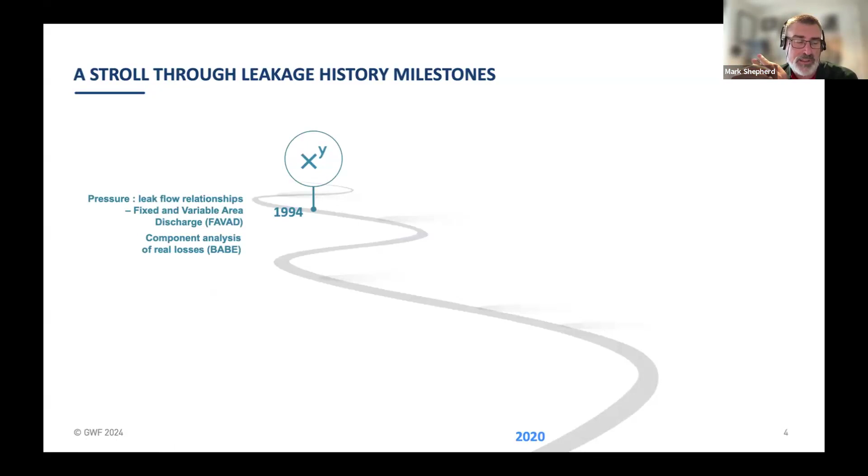Before then, I'm going to take you through a little walk through history. Alan, hopefully you'll enjoy this one. Let's take a walk through where things started. So what I could see, in 1994 we came up with 2 concepts: FAVAD, which is fixed and variable area discharge, and BABE, which came around about the same time. Next development was in 1997, when we started looking at night flow component analysis. Average zone point and night-day factors, or hour-day factors, came around then.

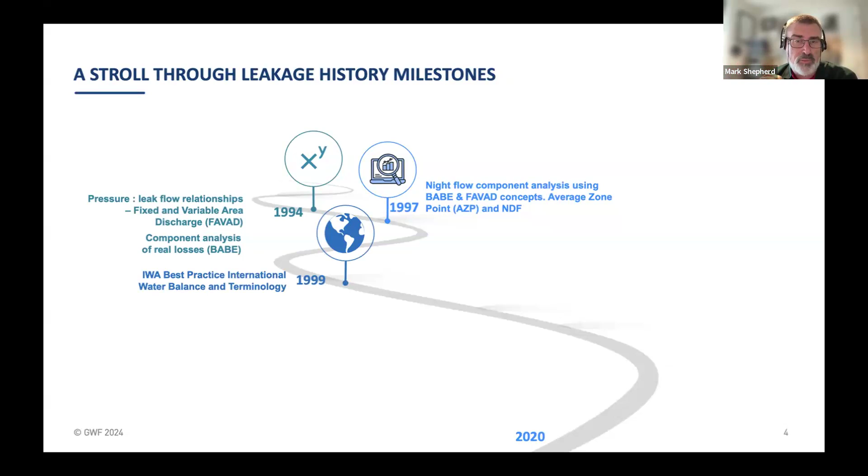In 1999, we came up with the IWA Blue Pages, the document which set out our best practice for water balance and terminology. In 2000, we came up with economic intervention policies and rate of rise of unreported leakage - that's a very complicated icon there, because doing the economic level of leakage was not easy, it was a bit of a donkey. In 2005, we simplified things a little, so we had economic leakage levels with and without pressure management. Then in 2012, the next development, we had pressure-burst frequency relationships.

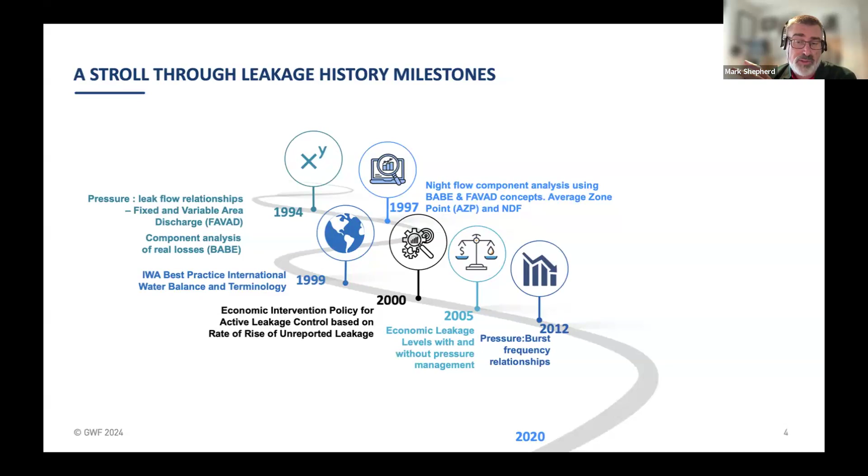2014, a really good document put out by Cor Mercs for the EU - the EU reference document for good practices on leakage management.

In 2017, we came up with N1 varying with pressure, which will be quite a strong point of the webinar today. And in 2020, a couple of people on this call decided to look at this again and see if we could refine it under certain conditions. That took place about three years ago.

Tracing all of those steps back in history, in 1980 was the first mention I could find of a DMA being published - I believe it was UK WAA, report 26, leakage control policy and practice, and that was the first thing I could find about a district metered area. So from 1980 to today, that's 44 years later, and we're still talking about DMAs.

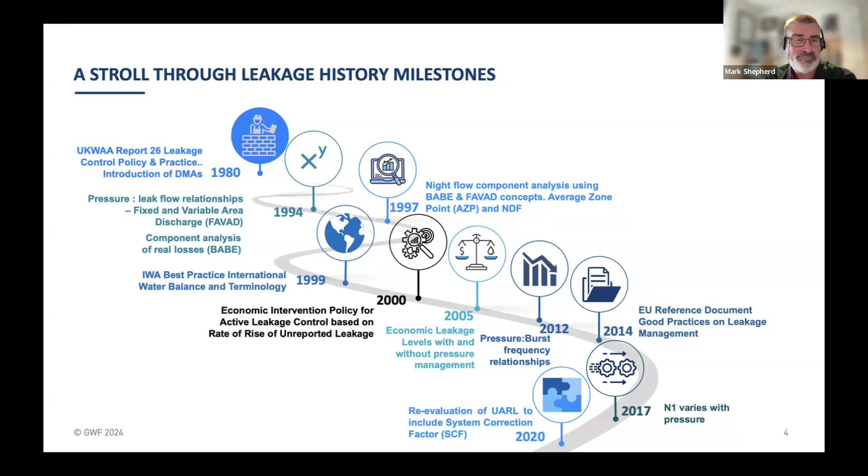So let's start with the building blocks. What are these DMAs? Just a few definitions - I've attributed each definition to its source as we go along.

Here's the first one: small zones between 500 and 3,000 households within a zone. Each DMA is discrete, meaning it's either watertight or monitored, with a defined and permanent boundary, with flows into and out of it monitored by a flow meter.

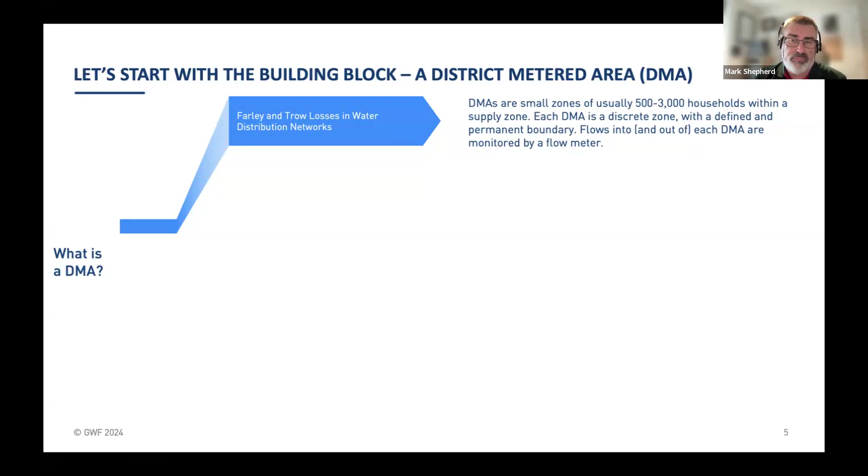Going back to 1980, a DMA is a discrete area of the distribution system created by the closure of valves or complete disconnection of pipework, through which quantities of water entering and leaving are metered. We then analyze those flows to quantify the level of leakage, which helps us as practitioners determine where leakage is and what we can do about it.

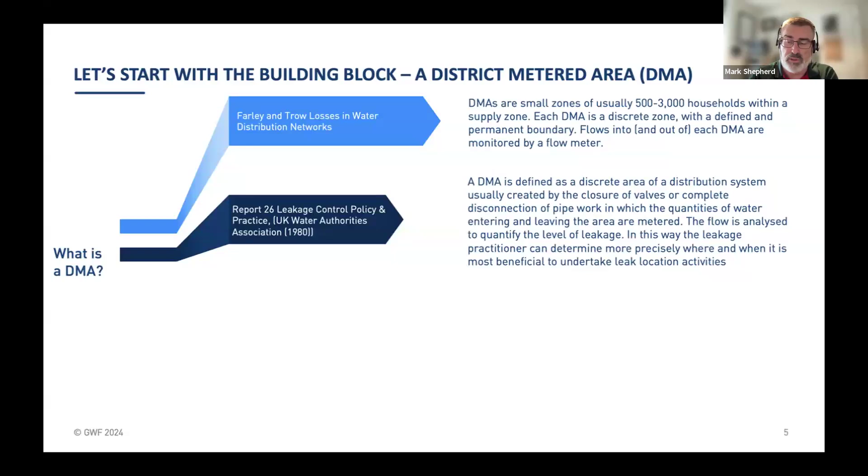Next, let's jump across the pond with the American M36 manual. There, a DMA is described as a small zone, typically between 1,000 and 3,000 connections, with measured supply input flow of sufficiently small volume that individual leakage events can be quantified. That's their definition.

And the last one, back across the pond to the UK, with UKWA's definition of a DMA: it's an area specifically defined by the closure of valves, in which the quantities of water entering and leaving the district are metered. So there are four definitions of a district metered area for you.

In terms of why we have DMAs, I'll go back to, in this case, just three reasons, with references included. AWWA states the purpose of a DMA - the primary concept and advantage - is to isolate and monitor a small area of sufficient scale so that flows can be analyzed to distinguish components of normal consumption from leakage rates.

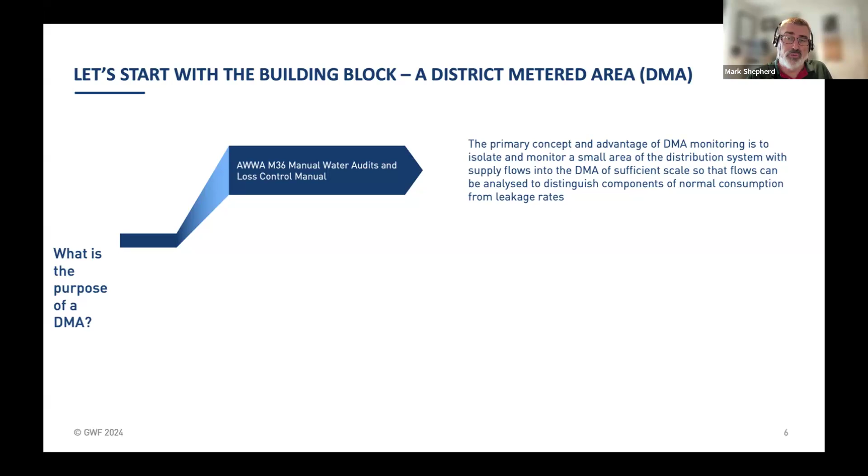Please excuse me if there's a later version - I only had a draft version of the guidance notes from the specialist group. But the purpose of a DMA there is to regularly quantify the leakage level so that leakage location activity is always directed to the worst parts of the network. Division or use of DMAs also facilitates creation of a permanent pressure control system, enabling pressure reduction, reducing the level of background leakage, burst flow rates, and burst frequency.

And the last one, from UKWIR: the purpose of a DMA is a means by which night flows can be regularly monitored, enabling detection of unreported bursts and leakage, and managing the pressure in each district so that the network operates at an optimum level of pressure.

So if you look, there seems to be a common theme internationally in the definition of a DMA and what we use them for - it's pretty much the backbone of what we do, and there seems to be largely a consensus on what they are and what we're meant to do with them.

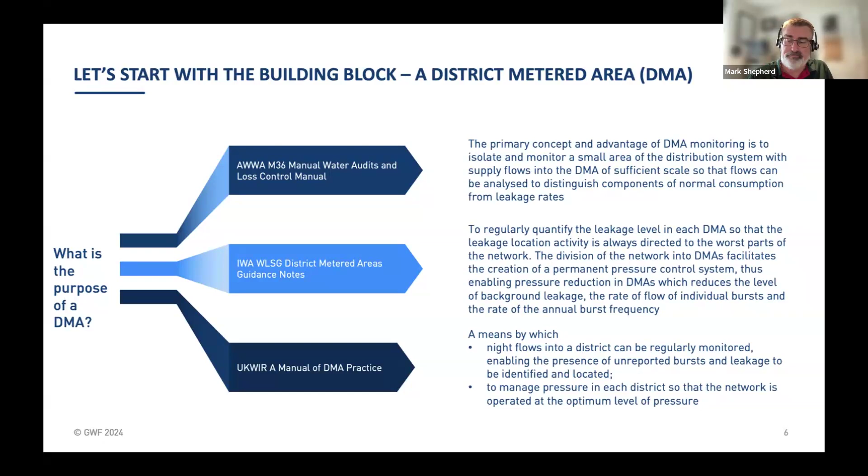So here's just what it might look like - here's an area for a water company, showing their DMA layout as an example.

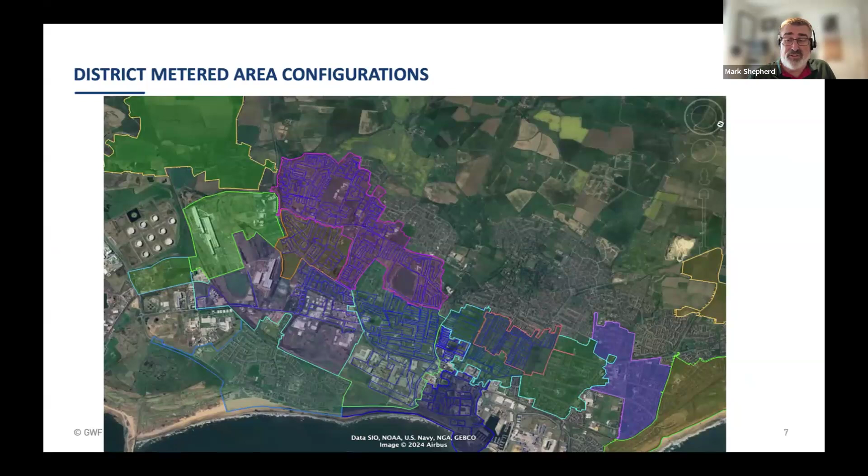I'm now going to go through some different configurations, because how we deal with a DMA really depends on how it's configured in the first place. So let's start with the easy one: we could have a DMA that has one inlet and no outlet - that's the easiest situation we can get for a DMA.

But we can also get a DMA that has one inlet and multiple outlets. We can have a single inlet DMA with a single outlet, another DMA with multiple inlets and a single outlet, or a DMA with multiple inlets and no outlet.

And then the last one we have here is a DMA, but nested inside it we might have these things called PMAs, or pressure managed areas. A lot of people use the terms DMA and PMA interchangeably, but they are not the same - they're different.

But if you get used to the acronyms here, a PMA can be a DMA on its own. Just be aware that there's two different things. So a PMA could be a DMA, but often you'll find some DMAs will contain a number of different pressure managed areas inside them. Those are the kind of configurations you'll find out in the field when you start working with them.

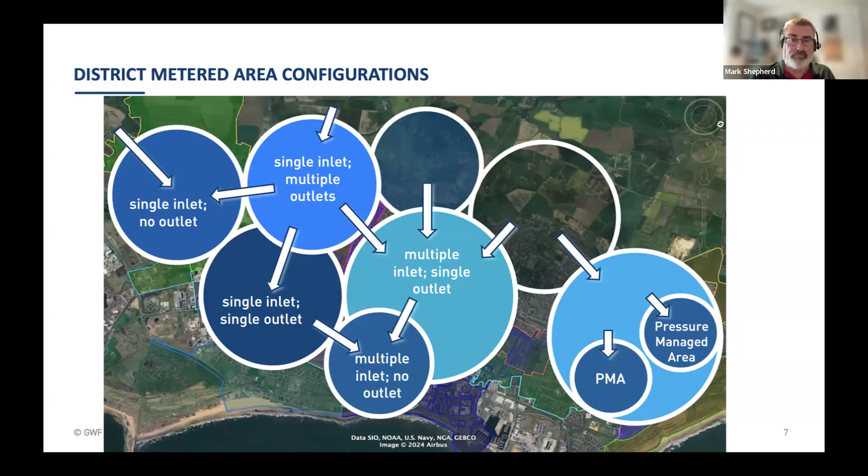In terms of some operational scenarios, I've tried to put my graphic skills to the best I can. So there's a typical gravity supplied area with some profiles into a zone. We have the blue line, which is the amount of water going in. We have how much water is coming into a DMA, the average zone pressure in the DMA, and our leakage. I'll come back to the relationships between these profiles later on.

But now let's show these DMAs and how they work. So here's a DMA, in this case a water bottle. If it's operating discretely, whatever happens inside this little DMA with pressure is not affecting any of the bottles next to it. There's no connections between the two here. This moving up and down represents the day-by-day version. Whatever happens in here is not affected by the two bottles or the two DMAs on the other side. But what happens if these are interconnected?

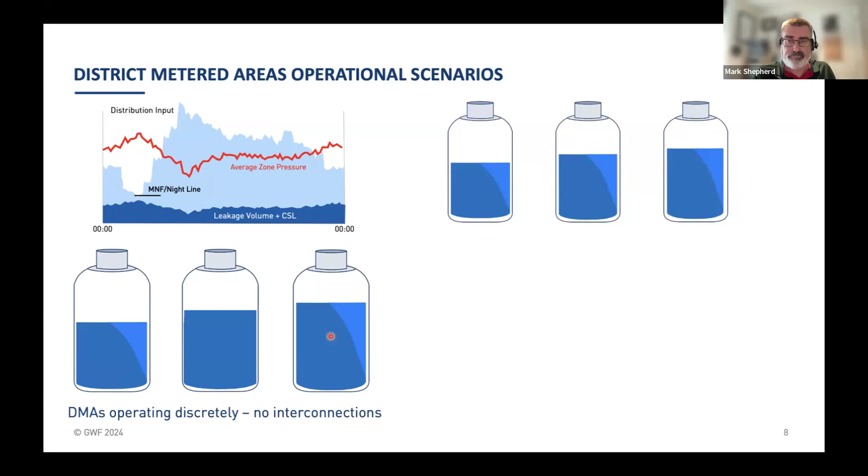If you've got two DMAs that are linked, then basically conservation of energy means the water will flow to attempt to achieve hydraulic equilibrium. Water will flow between the two DMAs to try to get some level of balance. It's a simple law, and that's what will happen. So if we've got flow going from an adjacent DMA that has a slightly higher pressure - just take this as head of water - going into a DMA with a slightly lower pressure, the flow is going to go from the higher pressure to the lower pressure.

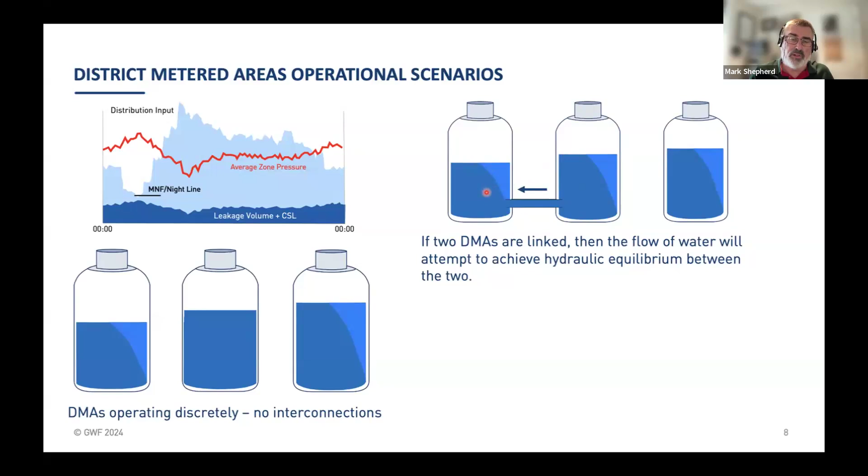On the other side, if you've got that way, that means water will leave the DMA. We'll come back to that, but the water will leave, and if the zone is linked into an area of higher pressure, then you're going to have water coming into your DMA. So your water will either leave or come into a DMA, depending on how it's breached or how it's linked between the two. Water will always flow from high pressure to low pressure - it will always try to reach some form of hydraulic equilibrium.

If we don't understand it, or we don't pick it up, then really all our leakage calculations that we'd be doing in the DMA are pretty much wrong. Because we could be looking at the DMA as supplying a far larger area than we thought it was. So we could end up with incorrect numbers, because when we analyze what's happening in the DMA, our assumption - or we try to get to a point -

So Michael, has my PowerPoint disappeared? I can still see it. Oh, okay, it disappeared from my screen.

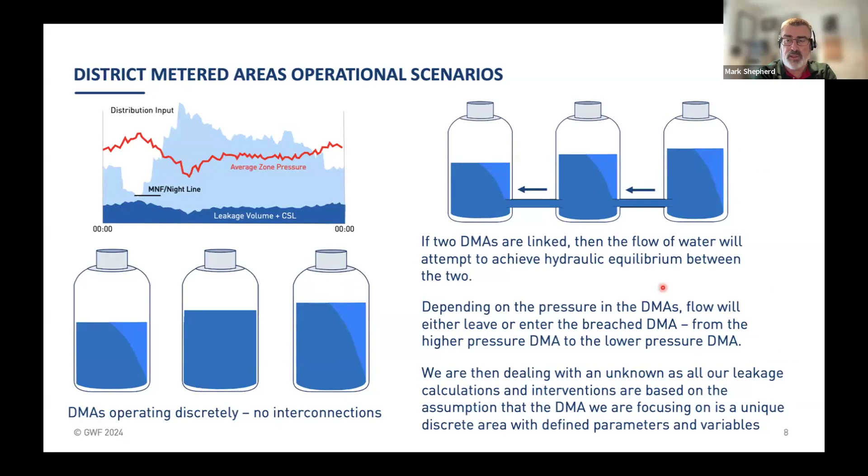Okay, so we always assume that the DMA is unique. It's defined as discrete, we know the parameters, we know the variables, so we can analyze it properly. If it's breached or connected to another DMA, then all those calculations and analyses are pretty much worthless.

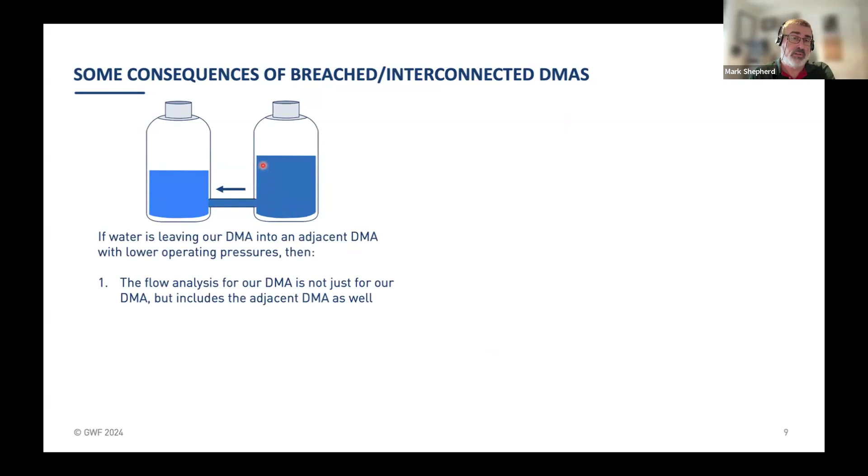So the consequences of dealing with breached DMAs. In this case, I have a DMA linked to an adjacent DMA, where we have higher pressure than the adjacent one. If water is leaving our DMA, then any flow analysis we take isn't just for our DMA, but includes what's happening in the adjacent one as well. As a result, we may calculate leakage as being much higher than it actually is, because we're looking at essentially two zones' worth of leakage.

If we use that, we might plan incorrectly, doing planning based on incorrect figures. Then pressure management won't work inside our DMA, as the pressure will try to get to a critical point target normally, but it'll never get there because water's siphoning out into another area. You might find that the PRV, for example, might even sit fully open in some cases and not be reducing pressure at all. That would completely negate any kind of leakage reduction through pressure management. So that's one consequence if we have water leaving our DMA into another one.

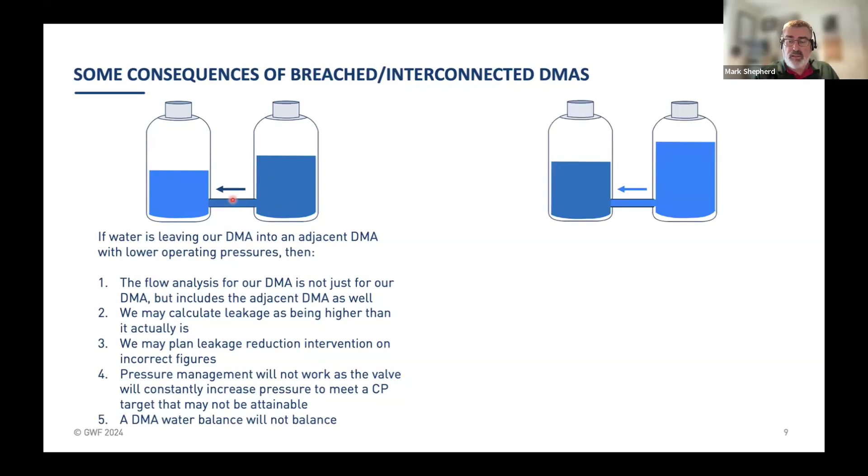And obviously, if you're doing a DMA balance, it won't balance. If we have it the other way around and we have water coming into our DMA, then the flow analysis we're looking at would exclude the area that's supplied by the adjacent DMA, and we wouldn't know how big that is. It might be some of the zone, it might be all of the zone. We don't actually know, so the flow analysis would again be incorrect because we don't know how much of our DMA we're feeding.

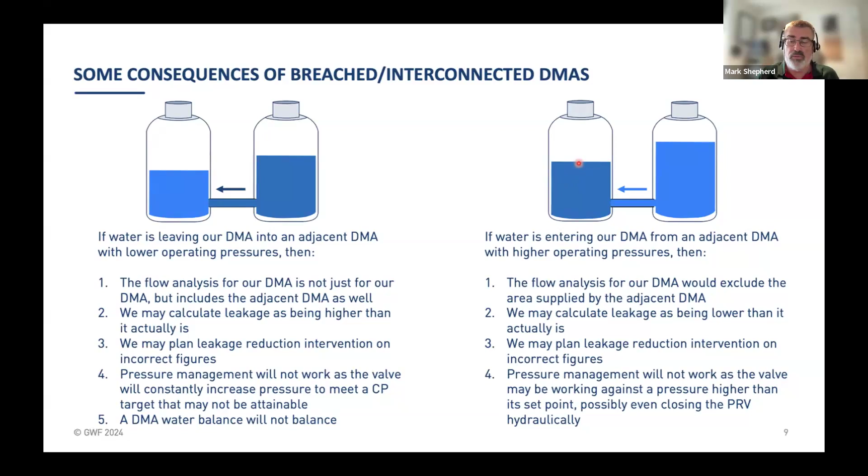If that is the case, then leakage calculations will come out lower than what's actually happening. Again, you're going to plan on incorrect figures, and then pressure management inside our DMA won't work because the valve might be working against pressure higher than the set point. In worst case scenarios, if you have a zone breach and we're doing pressure management inside our DMA, the PRV itself will hydraulically close at certain times of the day. So it renders pressure reduction pretty much redundant—it won't work at all. And again, the balance won't balance.

So let's look at some ways of confirming discreteness of a DMA. The first one is we basically go and look at the boundary valves that define a DMA, and do some valve sounding. What that typically involves—people don't always do the first part—but you normally exercise the valve: open and close it first, then listen to it. If it's slightly cracked, you'll hear water passing through, pretty much the same as a leak.

Another way of doing it is to look at pressures cross boundary. If you have a closed valve that defines the DMA, you could take pressures inside the DMA and outside the DMA, assuming they're working under different pressure conditions. As long as there is a pressure difference across a valve, you could probably safely assume that valve is closed. So you could do a cross boundary check.

You could also do something called a partial zero pressure test, to avoid the most extreme method. I'm going in order from the most simple to the most complex. A partial zero pressure test means we reduce the pressure inside the DMA, but make sure the pipes always remain full, and that we don't compromise a customer's level of service. So if your minimum level of service to a customer is 20 meters, then we would drop the pressure down to effectively 20 meters at the critical point and no further. That's a way of determining discreteness.

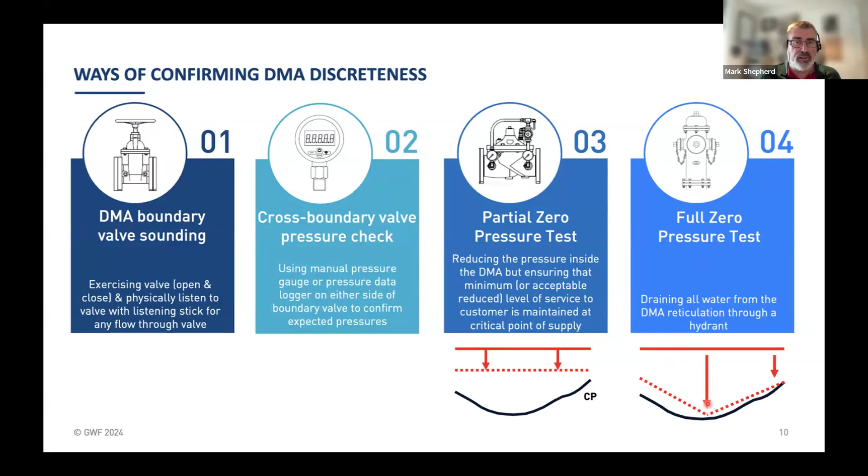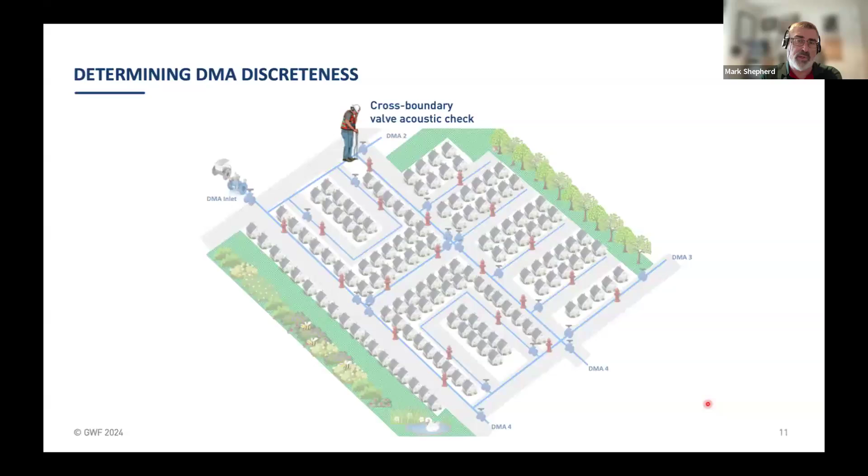So just to put it into some pictures, here's my fake DMA. The first way to look at it again is cross-boundary valve acoustic checks—you can listen for sound across the valve. You can do your manual closure, physically opening and closing the valves, or you can do this cross-boundary pressure check.

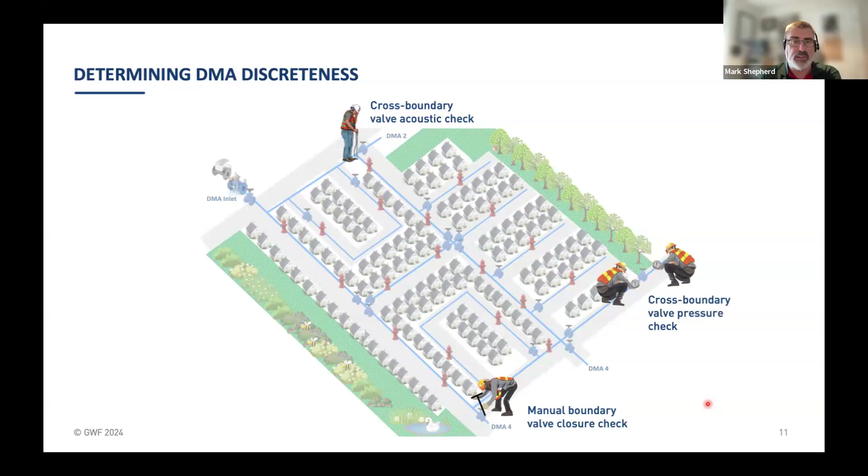So that's the easiest way. A partial zero pressure test, that's there. I'm going to put these up here. You have a critical point, and you just pick a pressure point inside the zone.

You would induce a pressure drop at the inlet, and assume that the pressure recorded either at your monitoring point or the critical point, if it's not breached, the pressure at those two points will drop as well, kind of following the induced pressure drop. If it's not breached and you're monitoring what's happening outside your own DMA, pressure outside the DMA shouldn't change, and won't respond to an induced drop in your DMA.

If the zone is breached, then what you will find in terms of pressure profiles at your measuring point is pressure could initially drop and then recover and go higher, which means water's coming into your zone. Or it could start dropping and then further drop away, because your zone is supplying somewhere else.

And then in your adjacent DMAs, if you are monitoring pressure, the pressure might go up or down because of your induced pressure drop. So that's a partial drop — it means we take it down to a certain level, just to keep our little critical point happy and to keep all our pipes full.

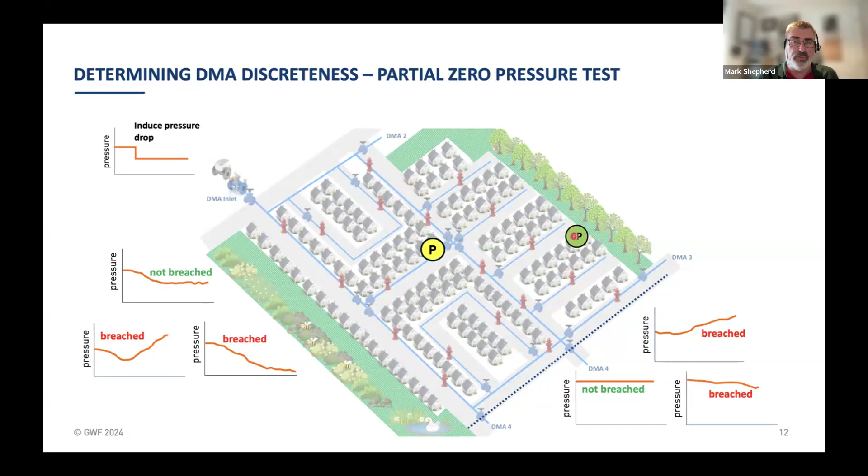We then have a full zero pressure test, which was long regarded as a standard, but it's an absolute nightmare from an operational perspective. Here's what happens: you would effectively close off the supply to the DMA completely. You'd shut it off — there's no more water coming in.

You'd then find a hydrant at the low point, open it up, and waste a whole lot of water onto the streets. Then you'd watch what happens with your pressures. If the zone's not breached, wherever you're measuring pressure, the pressure will drop down to zero, and there shouldn't be any change on any adjacent zone.

If it is breached, you're going to find the same thing — even though you shut this off, water will always kind of come into the DMA, which means the pressure is going to start dropping and then recover again because there's water coming in from somewhere else, even though lots of water is being wasted. And then you'll pick it up from an adjacent zone, where the pressure will start dropping because it's feeding into your DMA. So that's the kind of four tests.

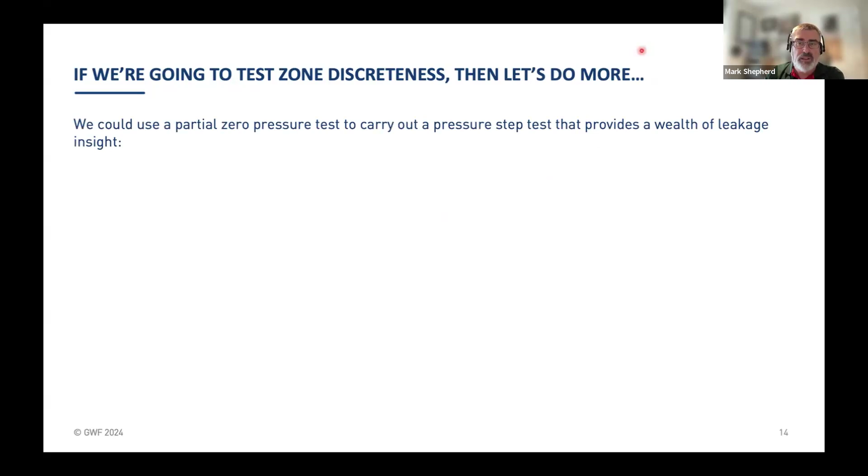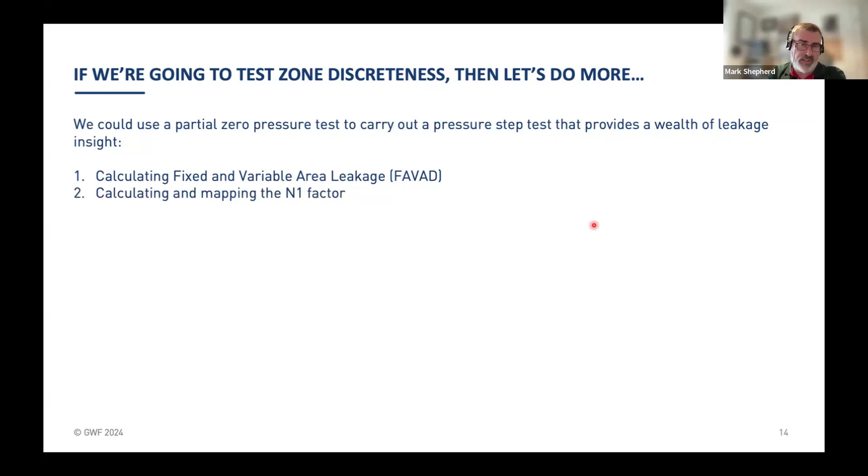So if we did the step test, we could start looking at fixed and variable area leakage. We can use information from that to get basically leakage behavior. We could calculate and map the N1 factor, which I'll get back to you just now. If you aren't familiar with it, I'll come to it just now, but that basically defines the relationship between pressure and leakage.

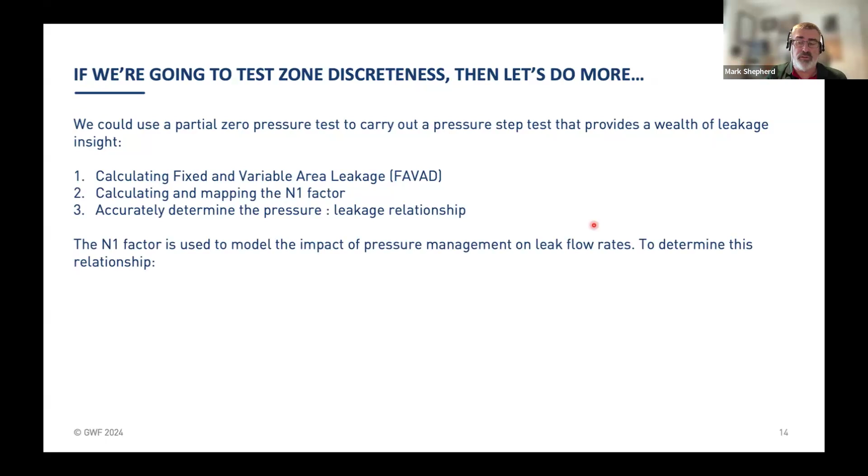And that N1 factor is really used to model the impact of pressure management on leakage flow rates. Okay, so to determine the relationship, we need to use the average zone pressure inside the DMA. So you'll notice for the discreteness test, I just put pressure arbitrarily inside the DMA.

If we're going to use the test for more information, then we need to use the average zone pressure inside the DMA, and that's critical—it's got to be representative of what's happening in the zone. We can't use a proxy off a critical point or from some other point in the network. We need to calculate it correctly, and then take the pressure at that point. Okay, and that's quite key for the calculations.

Yeah, we can look at historical measurements from what's been going into the DMA. Most water companies have flow and pressure measurements for most of the DMAs—we can look at it. So we just say, right, if we were going to do a test, what normally happens is we would look at dropping the pressure in the early hours of a Sunday morning, when consumption is at its absolute lowest, but that's typically in Europe or the US.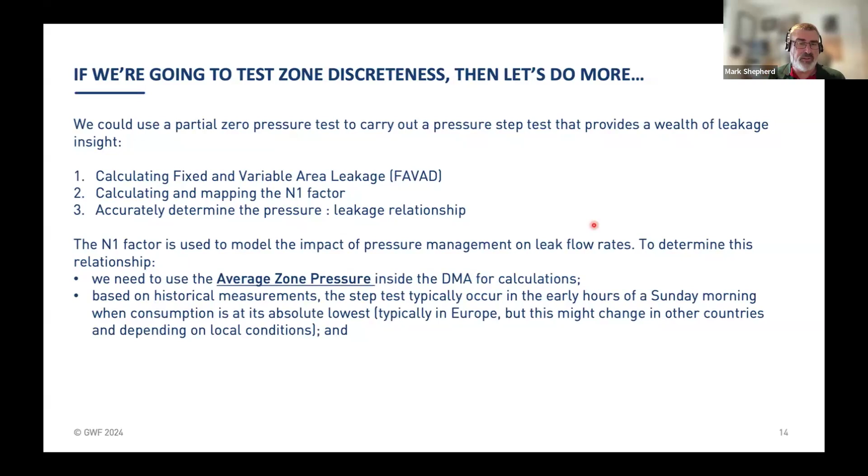But again, this might change in other countries. So if you're working in Arab countries, obviously your weekend is a day earlier, and there may be other local conditions that might affect it. But then typically we try to do a step test in the early hours of a Sunday morning, and again the pressure drop—we're looking at between a couple of hours, not too short, but we need something that gives us a bit of stability so we can analyze the data correctly.

And the pressure drop—if any of you are aware of the history of doing N1 tests, it used to be a multi-step pressure drop. So we used to drop the pressure down in a couple of steps and then recover in a couple of steps. We found that that's no longer necessary, so we can do a single drop, just one step only.

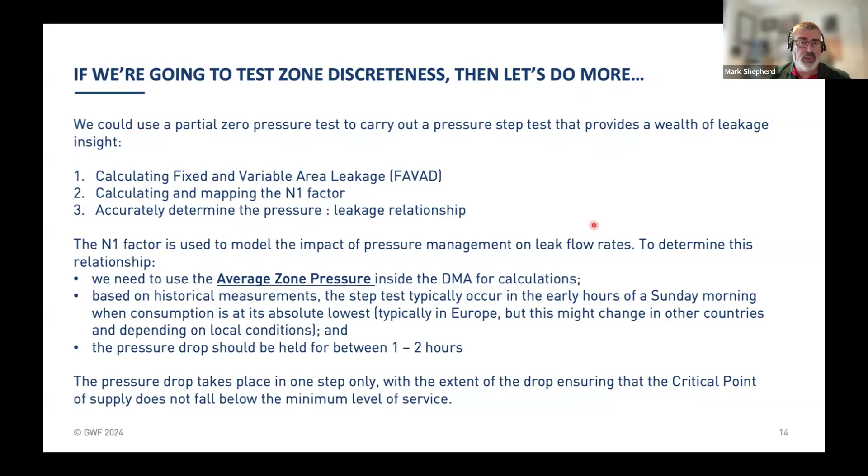And the extent of the drop, really, as long as we don't go below the minimum level of service at the critical point of supply, the pressure drop can really be anything up to that. So we've got a bit of leeway in terms of doing a pressure drop itself. So here's this kind of moving now from the partial zero pressure test to the N1 step test. Okay, so you'll see now we're monitoring pressure at the average zone point. So we've now identified this point, and that's where we need to monitor pressure. Okay?

So we're going to take the elements of a partial test, and we're going to induce a pressure drop into the DMA for a certain amount of time. That pressure drop that takes place, we'll agree on what it is, and assuming it's discrete, critical point of supply, we will also see the pressure drop roughly the same profile as the inlet.

We want to stay above our minimum level of service. And at the average zone pressure point, we should also see the pressure drop tracking what we've done at the inlet. We'll be measuring the flow at the same inlet point.

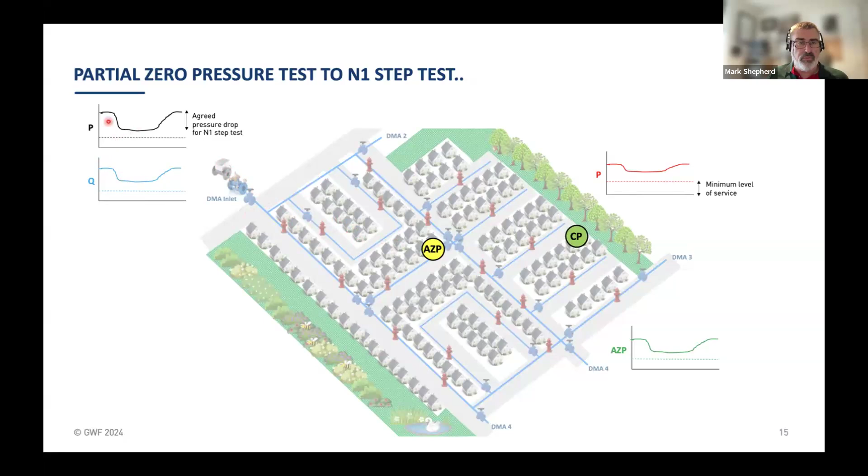So we want to know how much water is going into the DMA, and the flow should drop with the pressure drop. We'd expect the flow profile going into the DMA to pretty much mirror the pressure profile. Once we've done this small pressure drop, held it for a bit, recovered back to normal, we are after this little window of information that's got our pressure drop.

This would be our baseline pressure. We would drop it down to a new pressure and then recover, and we'd have our baseline leakage or flow rate. It drops down and then comes back up and recovers. So that's what we want out of effectively a partial zero pressure test.

We've now changed it into another test, which is going to give us a lot of information about leakage. That's the kind of thing that we're after for that.

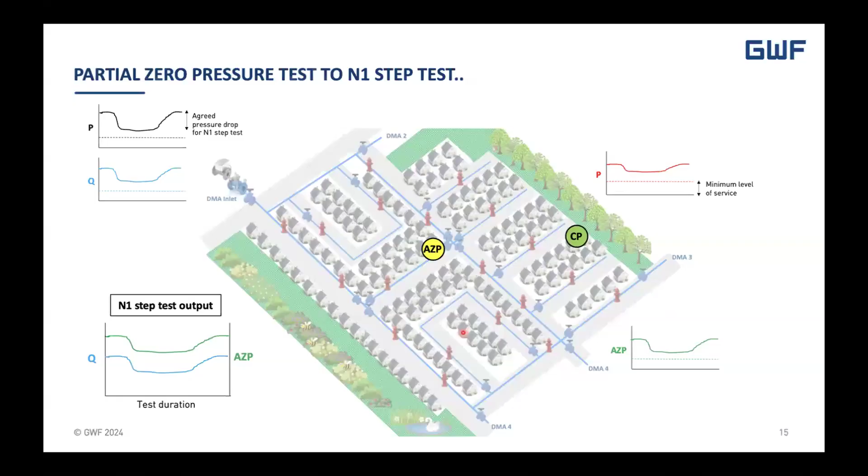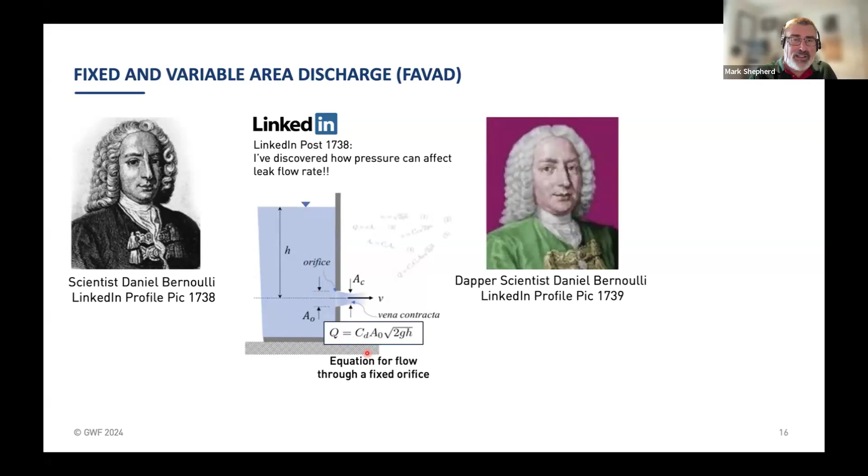But then, quite a few years later, a gentleman named John May came along and said, well, what happened if the orifice changes size? So even though he was long gone, Mr. Bernoulli is a little bit embarrassed now.

John May was kind of the pillar of research, coming up with the concept of FAVAD, which is this fixed and variable area discharge. He was the guy who set the scene for us, he did most of the development of our equations. He kind of challenged Professor Bernoulli back in the day, and we used what he did, we carried on through all our calculations.

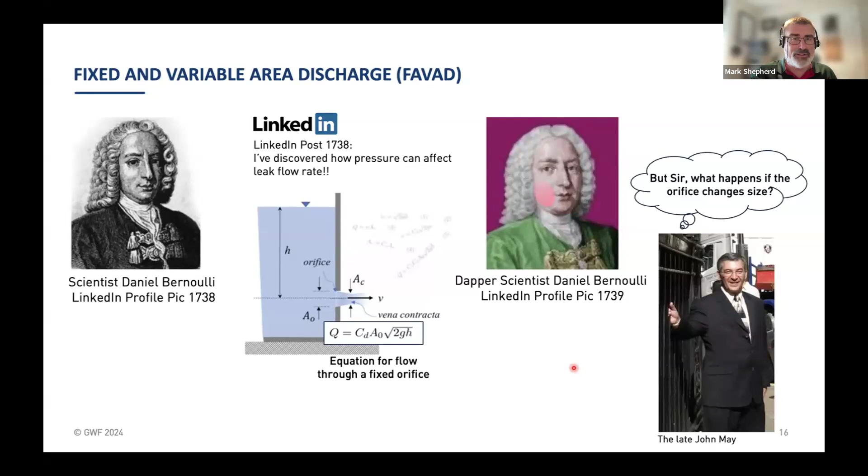So fixed and variable area leakage paths, I'm not going to spend too much time on this, I'm just going to go through here. You should hopefully all be aware of this. So fixed area leakage, this is effectively Bernoulli's original equation, where we have a leak flow rate that varies with basically a factor to the power of 0.5, which is the square root.

So if you just think back to the previous slide where we had the formula that included a square root - that's fixed area leakage. It includes ring cracks and corrosion holes, and that's the least sensitive to changes in pressure. So here's our 0.5, or square root, relationship with leak flow rate and pressure.

Variable area leakage basically means that the more pressure you put in the pipe, the leak hole size is going to change. It will change laterally, it will change longitudinally, and that will vary with pressure to a power of 1.5. This occurs in flexible pipes and unavoidable background leakage, and is the most sensitive to changes in pressure. So here's our 1.5 exponent relationship with pressure and leak flow rate.

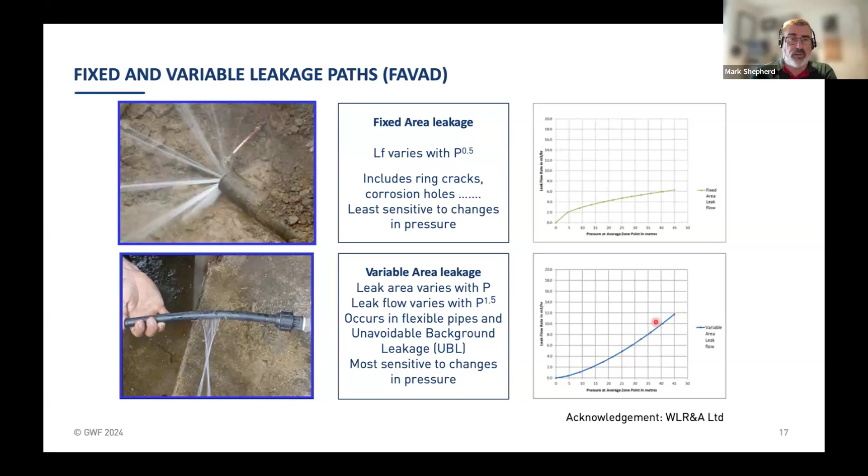We don't have only one of those leakages taking place inside a DMA. We have two happening the whole time - an element of variable, an element of fixed. We might have more variable than fixed, but the behavior of the curves is different, and we add them together to get our total leakage.

So if you're analyzing leakage and you want to drop your leakage down, ideally you'd like to know how much is variable and how much is fixed. Your variable area leakage is the one that responds to pressure management, and your fixed area is the one that you traditionally use active leakage control to go and find. If you find your variable area leakage is higher than fixed, you're going to concentrate on pressure management. If it's the other way around, and you have dominant fixed area leakage, you're probably going to get a better return going out and looking for leaks and repairing them.

Even though we have these two different leakage relationships, they're simultaneously happening in the DMA. One of the things we can do with the N1 test we just showed you is actually split that out, and figure out of your total leakage how much is fixed area and how much is variable area.

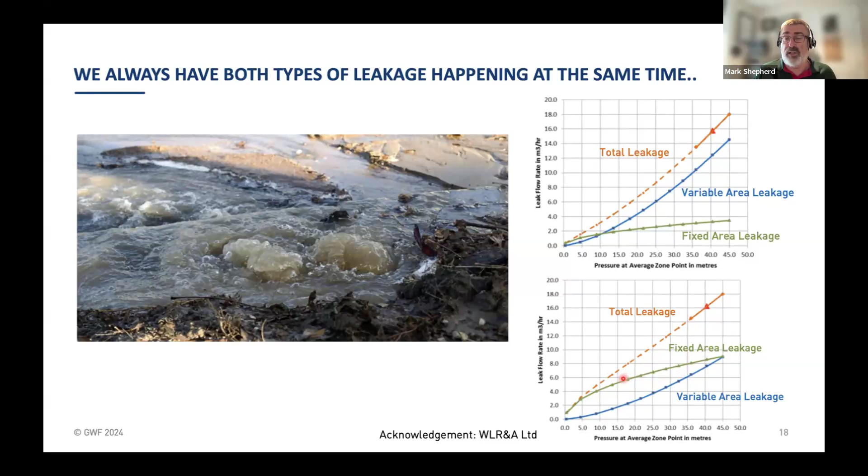So just to understand the pressure and leakage relationship, it's quite handy to explain sometimes how we've got the same hydraulic principle working against each other at the same time. That won't make sense at the moment.

But if you've got flow going into a DMA, you can see people are now asking for more and more water. Because of that, my pressure is dropping. So here I have flow driving a pressure change - whenever my flow goes up, my pressure is going to go down. That's the pressure drop induced by a demand, by somebody calling for water.

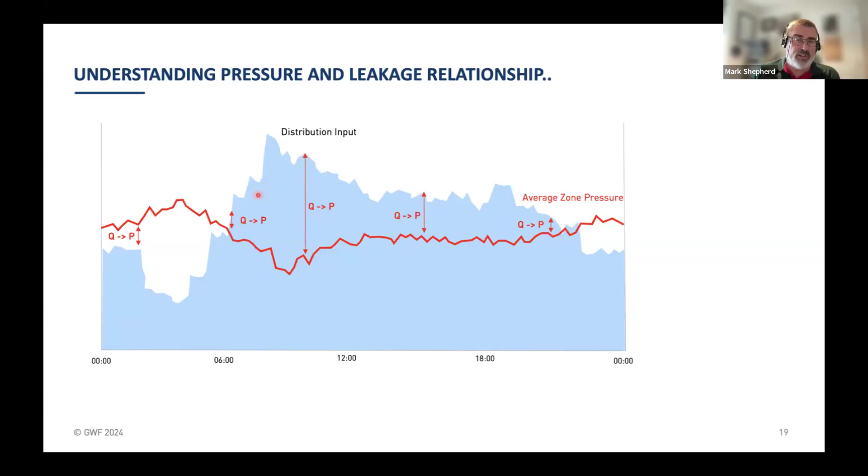We have exactly the same principle now working in reverse when it comes to the pressure profile and leakage. If we look at our night line, which is made up of reported leakage, unreported leakage, night use, customer side leakage, and our unavoidable and background leakage, all sitting under that line - so there's my leakage flow rate, because now the leaks are affected by the pressure profile.

So we have demand inducing a pressure profile, and we have a pressure profile inducing a leakage profile. Exactly the same principle, but working in reverse. And that's what's happening the whole time through a DMA.

This constant cycle, we've got flow driving to affect pressure, and that pressure is affecting leakage. That's the relationship that we want - we want this green line relationship when it comes to the leakage calculations.

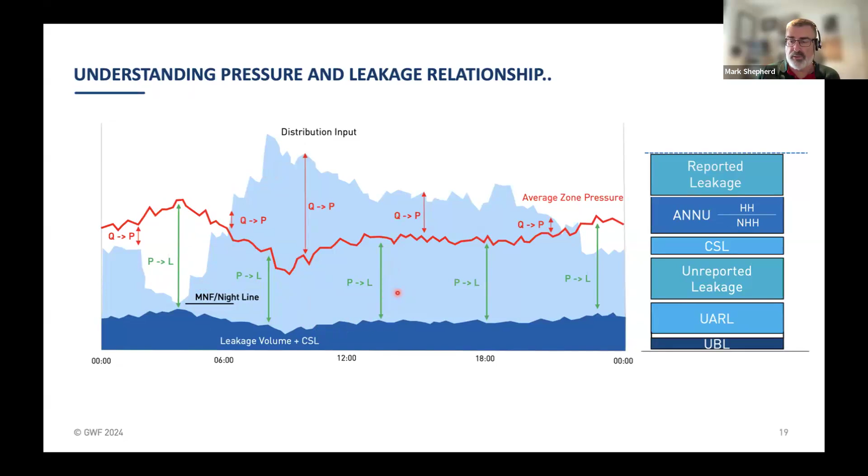So in terms of the curves, where we start looking at leak flow rate and pressure, we have a ratio of pressures and a ratio of leakage numbers. These are all your different curves, your fixed and variable. But let's make it really simple, and look at effectively a simultaneous equation here.

So if we have an initial pressure, we'll have a leak flow rate at that pressure. If we then take it to a new pressure, we're going to have a new leak flow rate because of the previous slide. So we've got pressure and leakage now linked - that would be my formula, and I would cancel out the area here.

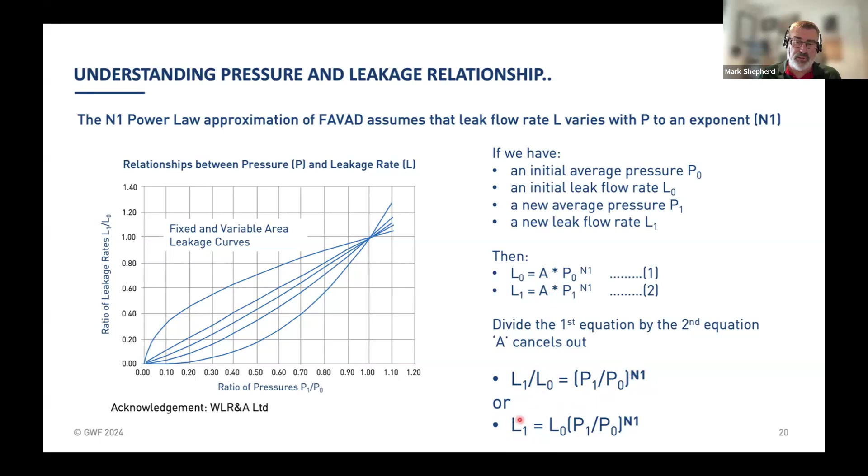So we have a ratio of leakage and pressure behaving to an exponent, which we've just tested for. Or more simply, our new leakage level is equal to our old leakage level multiplied by the pressure change to the power of N1. Anyway, as long as we know what's happening with the N1, and we know what our measurements are, we can very accurately calculate what's happening with leakage and do some predictions for the way forward.

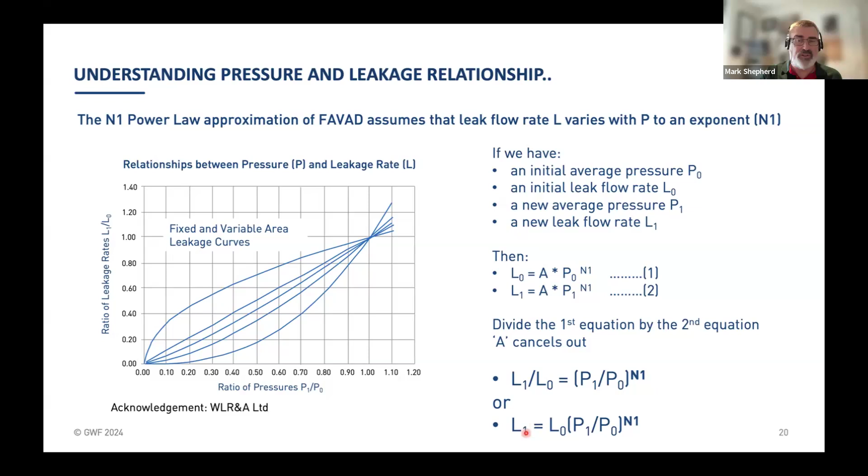So our N1 factor has two hard bounds. It can't drop below 0.5, can't go above 1.5, but I'll come back to that. Let me just put this up quickly.

Just to make it more hands-on, if we're looking at the N1 drifting down towards 0.5, you'll tend to be dealing more with rigid pipes in your network, and your intervention will probably tend towards active leakage control. If you go the other way and your N1 factor is bumping around up near 1.5, you would tend to have more flexible pipes, and those are the networks that respond better to pressure management. And if you have mixed pipe materials, we're very inventive as engineers, we'll just take the average.

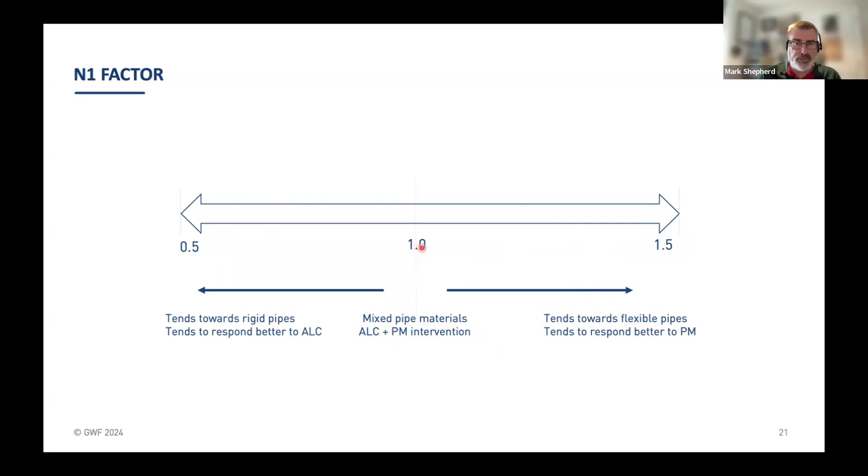So if we go back to this relationship now, which is what I showed in the previous slide, here we have leakage levels, old and new, pressure levels, old and new, and we have this number which sits somewhere inside this range.

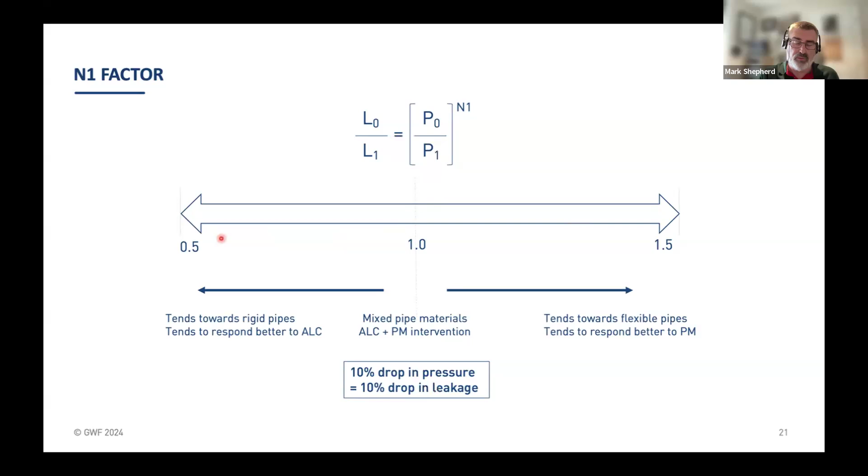If we have a factor of 1, this number is 1, we have a linear relationship. That basically means we'll have a directly proportional relationship here—the leak will be directly proportional to pressure. So if we drop the pressure by 10% in a zone, we'll get a 10% drop in leakage. That's a strictly linear relationship. If we start heading down towards 0.5, towards a square root relationship, a 10% drop in pressure will give us a 5-and-some-change percent drop in leakage.

Go up the other end—if I do a 10% drop in pressure and my N1 is heading up towards 1.5, best case, a 10% drop in pressure will give us a 15% drop in leakage. So that's kind of a rule of thumb you can use if you're looking at a quick case for leakage reduction.

So we've got this number for the N1, and it's not new—people have been doing it for a while. We get this number, and we've always assumed that the number is fixed. So whatever number we get from the test, that's the number, we're going to use it for all our calculations, get it done and dusted and move on.

There was a 2017 paper, I think combining both an academic and a practitioner approach, asking: is that actually true? Does it hydraulically hold that we have this fixed number? If we assume this is fixed, then we're also assuming that the percentage of fixed and variable area leakage doesn't change with pressure, which is counterintuitive because we know it should.

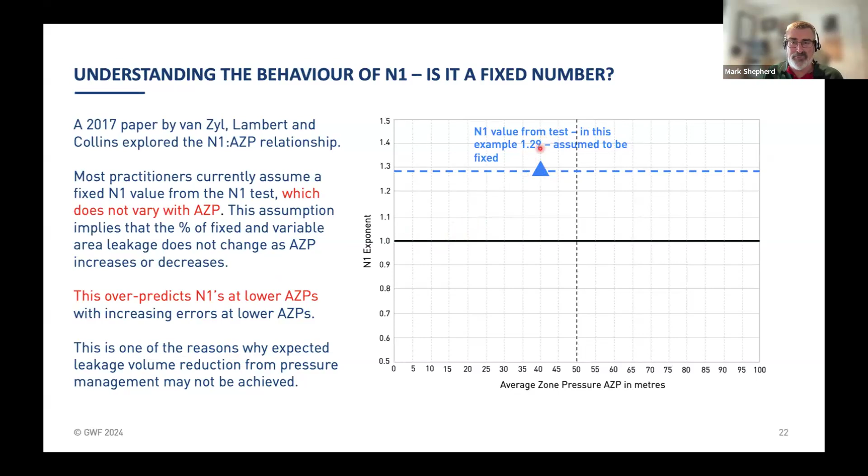So if you're dropping pressure, this number is going to start changing. So to explain it: there's our fixed number, but if we're changing pressure and we know we have FAVAD, then as the pressure changes, our N1 number is going to change. The moment we start dropping pressure, this N1 value is going to change, and we can map this using FAVAD—we know what this relationship will be.

What will happen now is your predictions—if you're going to say I'm going to drop the pressure from 40 down to whatever, you might predict a certain kind of leakage volume recovery, but you won't get it. You will have overestimated it. On the other side, exactly the same thing.

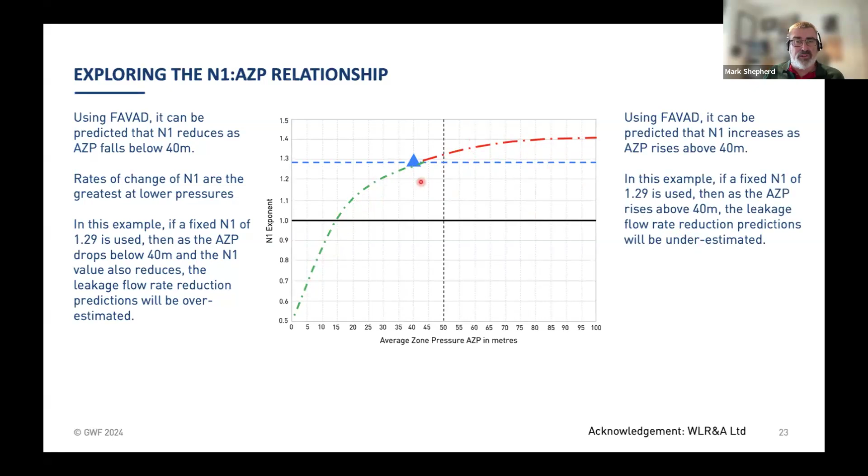This curve can still be mapped, we know what it is using FAVAD. The same thing would work if your pressure rises, and again you're going to underestimate your predictions. So the key takeaway here is if you do an N1 test and get a value, it is not a fixed value. So good practice is you state the number together with the pressure at which you got it, because that gives you a point on a curve, and then we can use FAVAD effectively to get this relationship between N1 and pressure, so we know how it behaves.

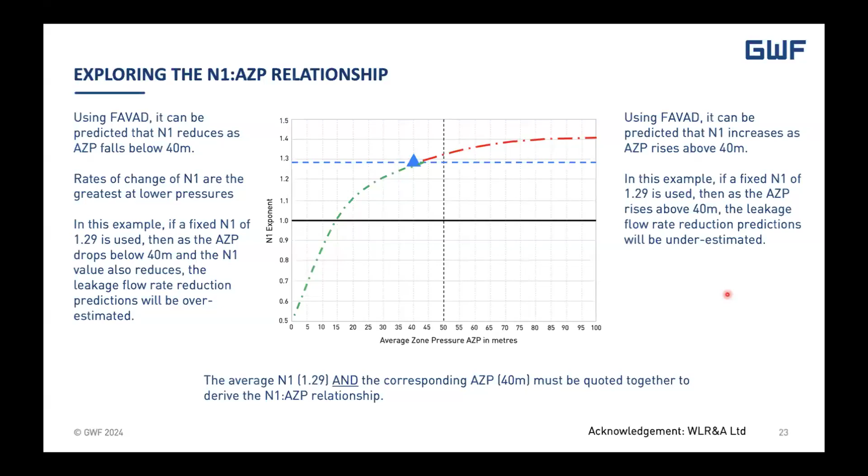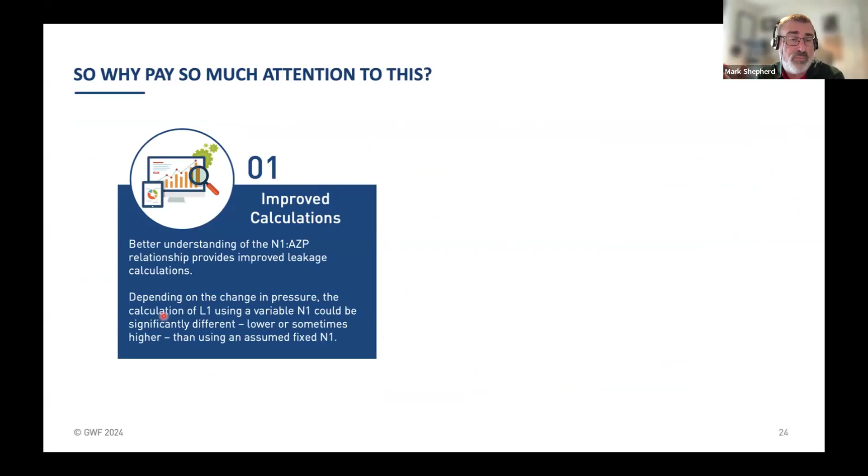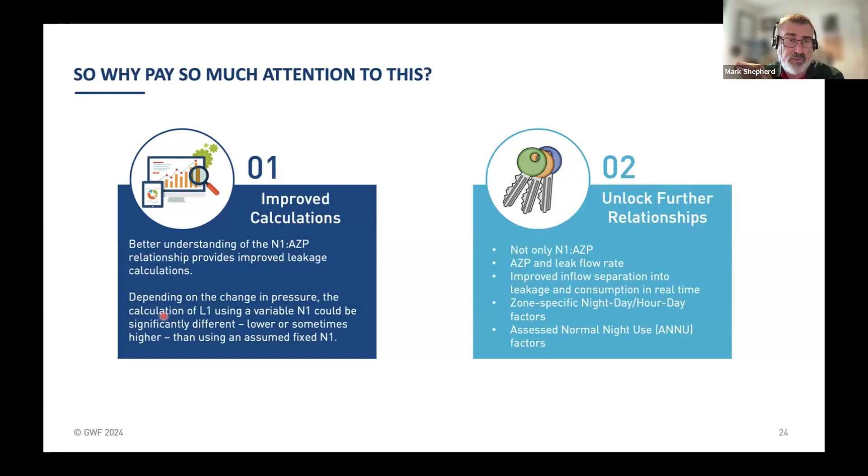So we're now getting into the crux of key things: why do we pay so much attention to this number? The first thing is we get much improved calculations — depending on the change in pressure, the calculation of leakage using a variable N1 could be quite different, so we get a far better understanding of how to calculate it. What's really cool, and what people don't understand, is we can unlock a whole lot of further relationships using this number. So we're not only looking at N1 and pressure, we're looking at pressure and leak flow rate, separating leakage and consumption in real time. We get zone-specific factors, night-day or hour-day factors, and we can even use it to assess or validate and sense-check normal night use factors. So we can go down to that level of detail using the same test.

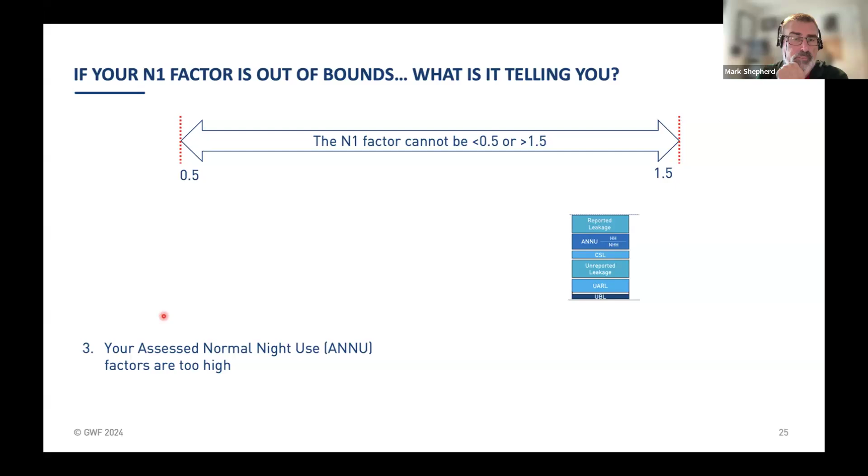Just a few things here: if your factor is out of bounds — sorry for my animation — your N1 factor can't be less than 0.5 or greater than 1.5. If it is, there are a couple of things it could be. This has now come out completely wrong, so what happened there? If it goes outside the bounds, it could be a breach, which is why you could get a nonsensical number. It could also be because consumption is still happening, so we've got bias from our night use, or your assessed normal night use factors may be too high — we're finding this more and more to be the case. So we're doing the analysis for getting the N1 relationship.

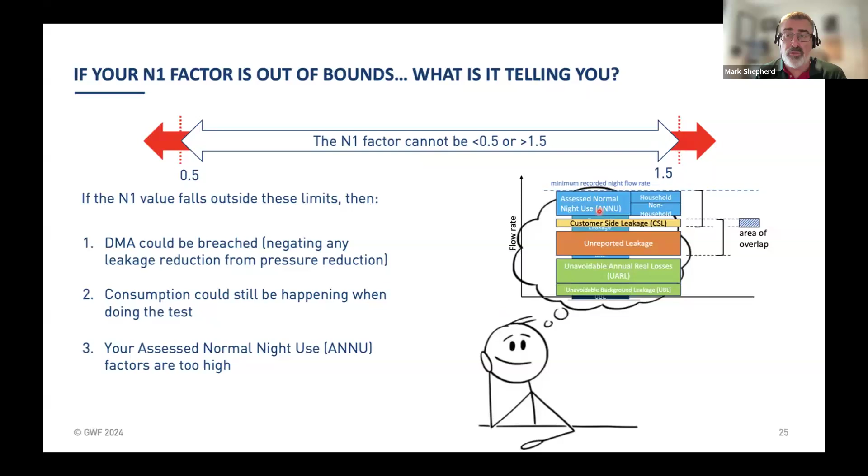We're often finding that we're getting nonsensical numbers, and it's driven normally by this assessed night use. We're finding the allowances for night use consumption are normally too high. A lot of the water companies have got these traditional factors they've used. We're getting better now with smart metering. But just be aware, if you're doing this in Europe or the UK, your factors will be too high, and that's what throws your N1 number out. So you might want to have a relook at that.

We've also done some advances in your unavoidable leakage, getting down to your lowest possible leakage, the whole question of how low can you go. You take your leakage as a big blob - you have reported and unreported. We have our unavoidable annual real losses, and background leakage sitting at the bottom. But we now also start looking at how low can you go. We can actually go a little bit lower under certain conditions.

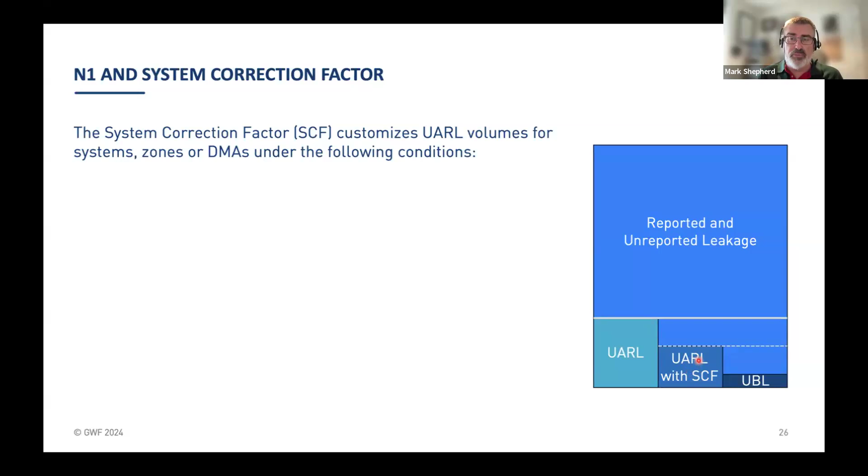WLR&A have come up with a really nifty kind of tool or aid. It's called a system correction factor, and that'll customize your unavoidable leakage - how low can you go for your zones, looking under certain conditions. It can handle any number of connections, and there's no real practical restrictions on pressure.

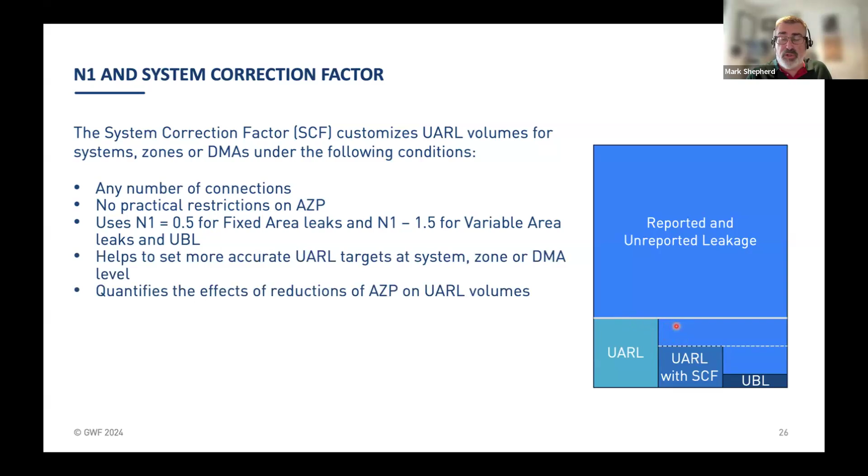We've got our standard allowances of N1s for fixed and variable area leakage. We can get that to set more accurate targets. So rather than heading for what we thought was the minimum, we can normally squeeze a little bit more out of some of the DMAs. We look at the effects of reduction of pressure on unavoidable, and it's a really good tool for getting the number and using that for prioritizing intervention, either pressure management or leak detection.

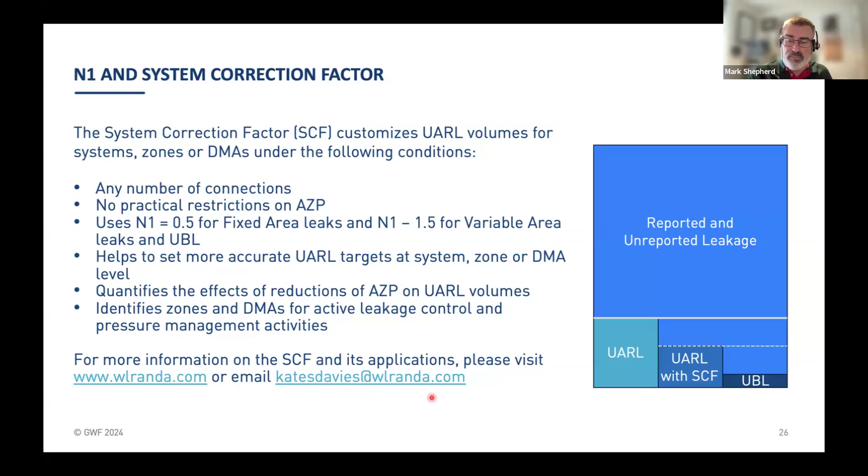If you need more information on that, I'm sure this will be put up somewhere - WLR&A's webpage has a lot of information on it. And Kate Stanton Davies, the MD of the company, there's an email address there. So if you want to find out more about SCF, which I suggest you do, pop on the webpage or give Kate a shout.

So how powerful is this thing? We're getting towards the end now. First thing, the N1 factor continuously maps the split in consumption and leakage. It can be used to do sense checks or fact checks made in component-based analysis. It contributes towards calculating the maximum recoverable leakage, again split into fixed and variable.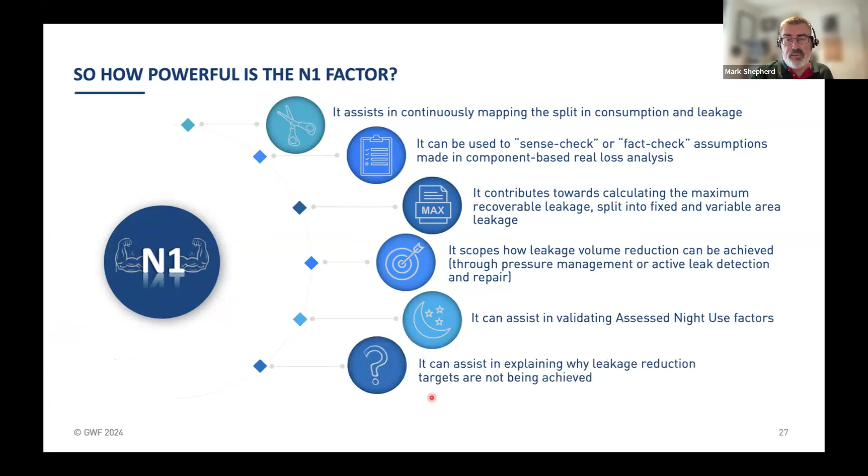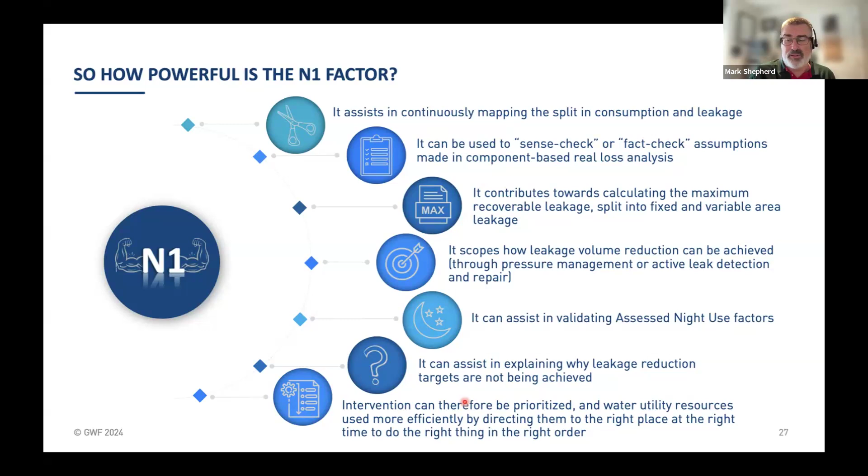It can give you a scope of how much leakage reduction can be achieved through each of them, through pressure management or ALC. It can help with validating your night use factors, and help explain why you're not getting the targets that you want. Using all of those, resource management can come out of it, because what we can do then is send the right people to the right place at the right time to do the right thing in the right order - there's your 4 R's. That's really what we're after - efficiency, so let's just send the teams to do what they need to do to get the result. And all of these things are coming from one little number that we've got from the test.

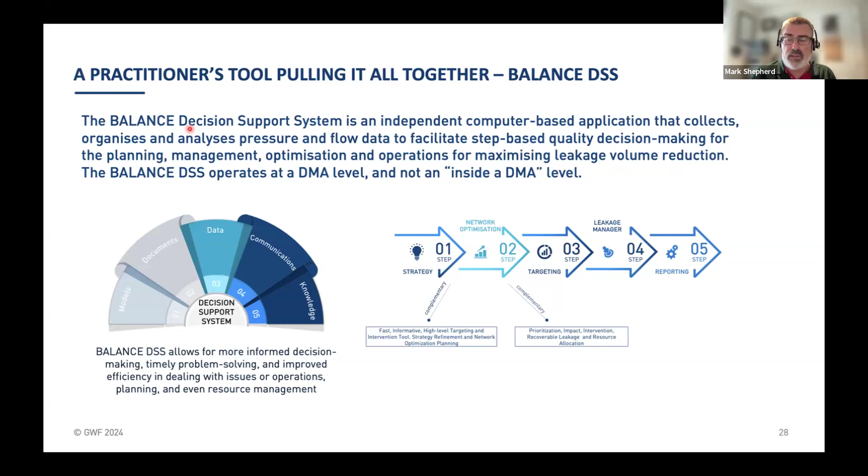So last one, a couple of slides here - there are some practitioner tools you can use to pull this all together. There's one developed by the company I was working with, called Balance. It's a decision support system that takes everything you've seen in the previous slides and basically puts it on a platform, allowing you to see what's happening and make predictions.

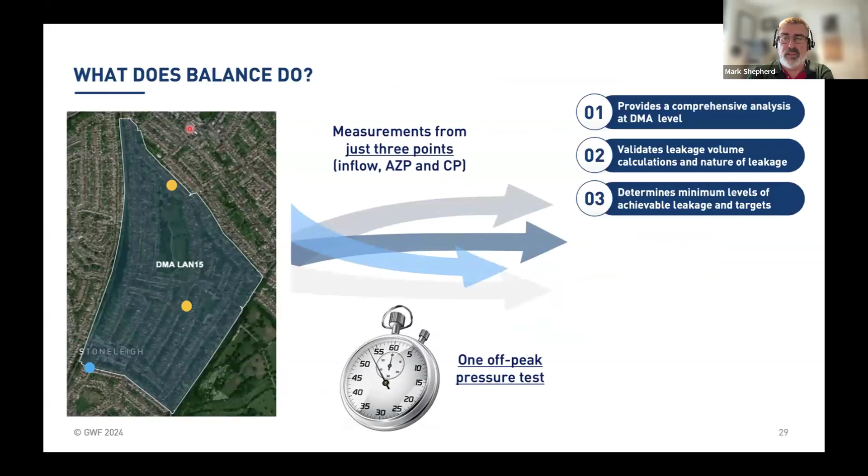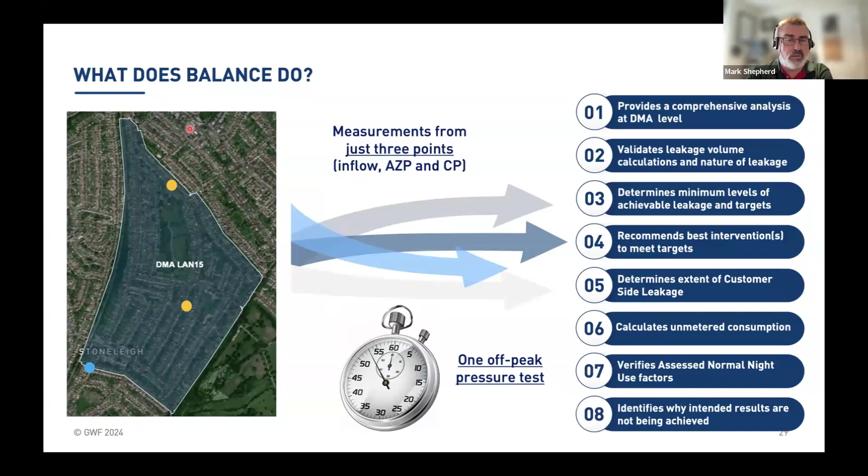So what does this platform do? There's a DMA, flow meter, and 2 pressure points - so we only need the 3 points, and we need the 1 off-peak test on a Sunday morning. What we get out of that is comprehensive analysis: validation of the leakage volume, the nature of leakage, the minimum levels of leakage, and it can recommend the best intervention to meet a target. We have a little algorithm that gives a pretty decent calculation of customer side leakage, and can very easily calculate unmetered consumption. We can verify night use factors, and again figure out why you might be getting the results you are.

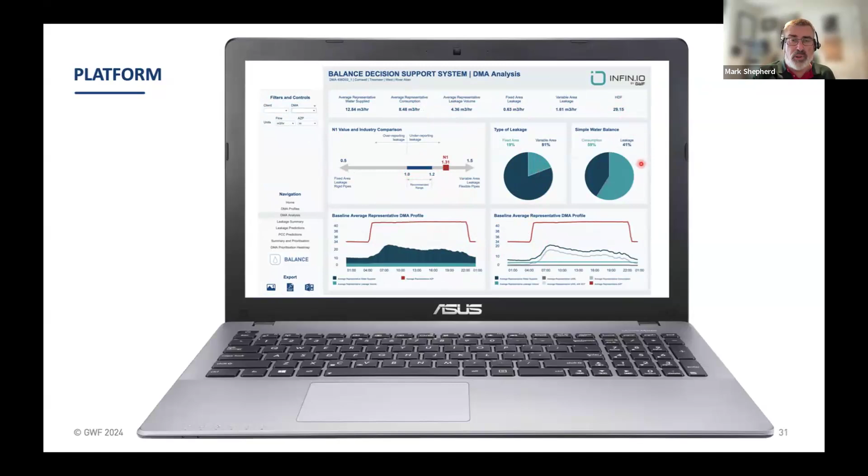You've got your profiles for the DMA split into different types - consumption, leakage, etc. Your type of leakage, all your splits over there, RLA factor - that all pops out. Here's all the system correction factor information that we need. This is looking at a standard UARL.

I'm not going to get into too much detail, but we can do the SCF, increasingly taking more parameters into account. So here you've got ILIs coming up, you've got condition index popping up, this is your current leakage, unavoidable, etc. So that all pops up there.

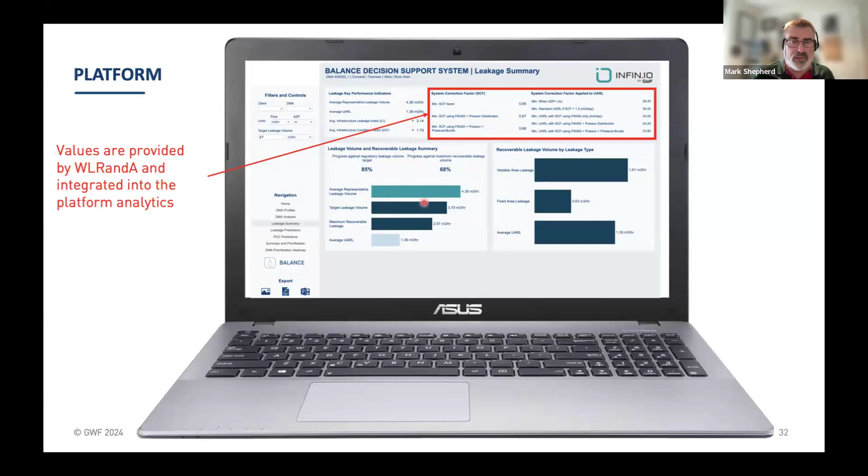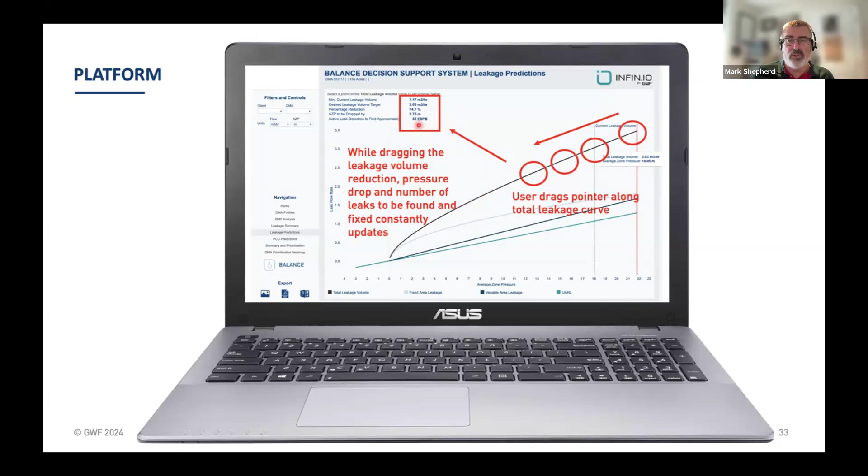You can drag it up and down and see what you're happy with. It then comes out and gets put into a prioritized table. You can choose whatever you want - pressure management, leak detection, total - click on it, sort will give you your priority for intervention. And then, I think this is the last slide, we've trialed this across the UK.

Quite a few - I've just chosen 18 DMAs. We've looked at what was the baseline leakage and what could we take it down to, the UARL and with the correction factor. And then in these 18 DMAs...

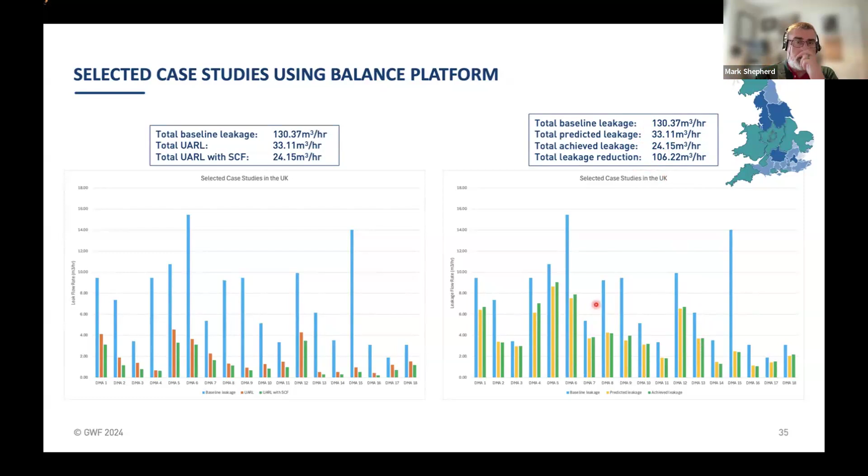130 cubes per hour leakage. Basically, with the tool I showed you, predicted that we could get it down to 33 doing different bits and pieces. Achieved 24, so you took a massive whack off the baseline leakage. Some of these down here - the graph might not be too clear - but some of these were done on already optimized systems. So the tool works pretty well once you've mapped everything out together.

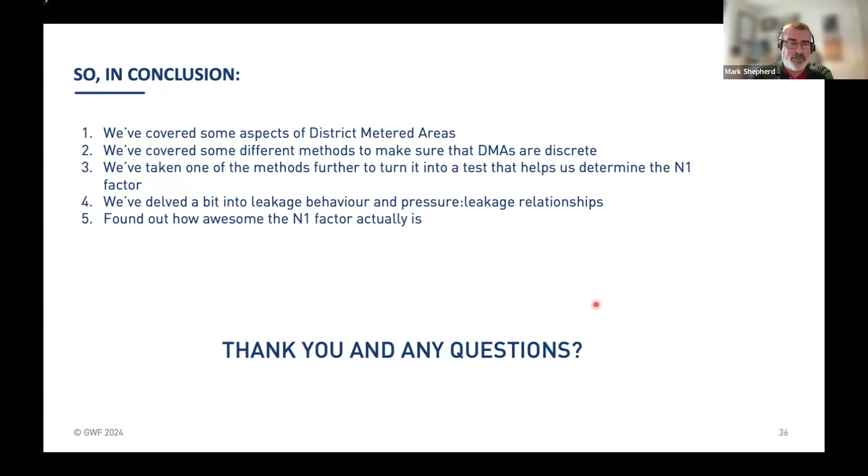So, conclusion. We've covered some aspects of DMAs, different methods to make sure they're discrete. We've taken one of the methods further. We've looked a little bit at leakage behavior and pressure leakage. We found out how awesome this number actually is - it's a very underutilized number. We've had some practical tools, and hopefully you've learned something along the way. So that's the end, and Michael, I think we'll be back to you.